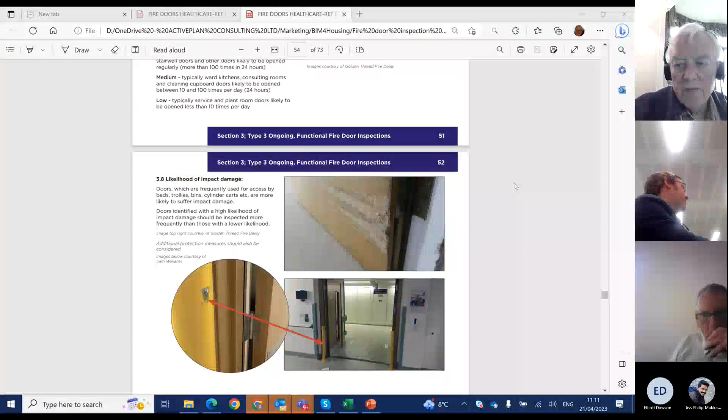Let me just share my screen. It's interesting, the guy coordinating this for us is Alan Oliver. He's the one that did the work for this, he's the author of it.

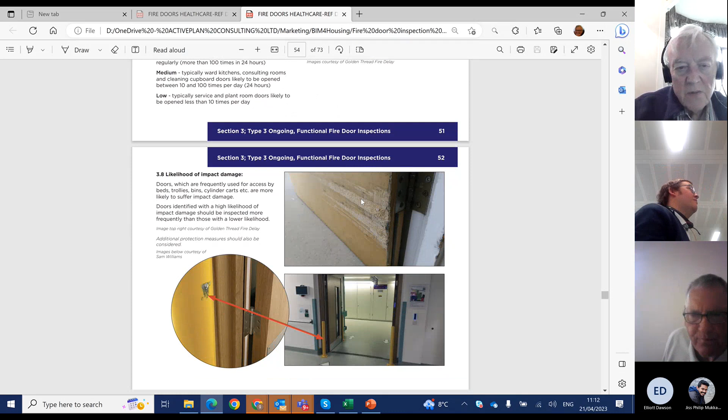Paul Bray from Plymouth pointed me at the guidance that's come out from the government, and when I went into it, it's actually got Alan's examples in there, which is nice. You see what he's got here to indicate what damage is and all that sort of stuff, so if we could get some similar material.

So you're looking for domestic pictures rather than commercial.

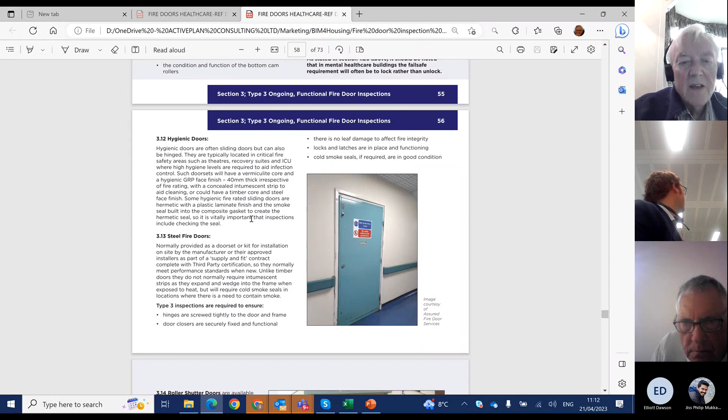A lot of it is a matter of doing a sanity check on the text. Alan's gone through and taken out the references to healthcare buildings, but your chaps will have a better understanding to see if there's anything daft in here that doesn't suit the purpose.

Do you get my drift? So this text here is what you've been, or what has been issued.

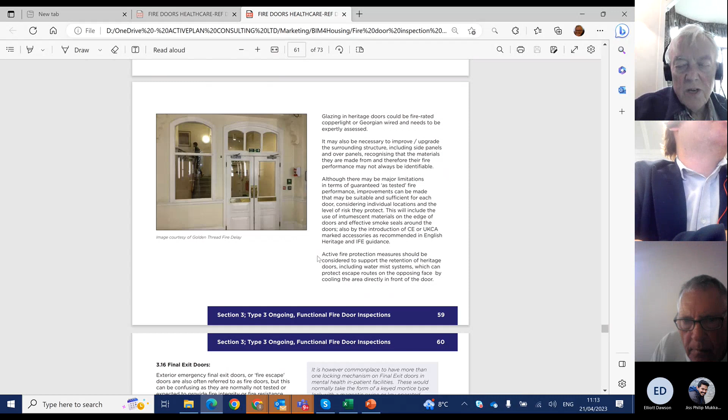Sorry George, back now. Yeah, that's right Paul. We're just talking about the work stream that Elliot's been helping with on standardising fire door inspections. Oh, fire doors are easier, aren't they?

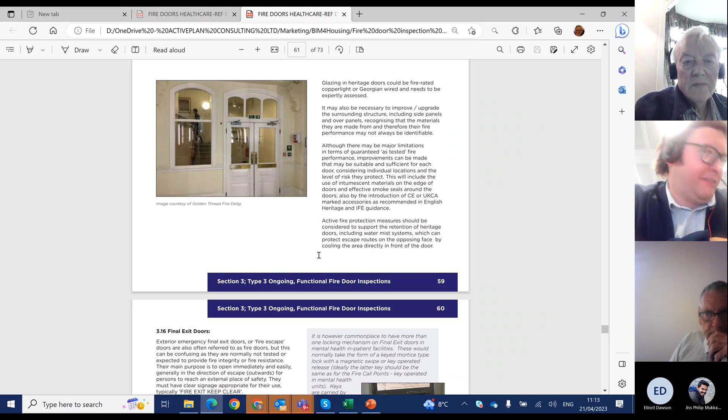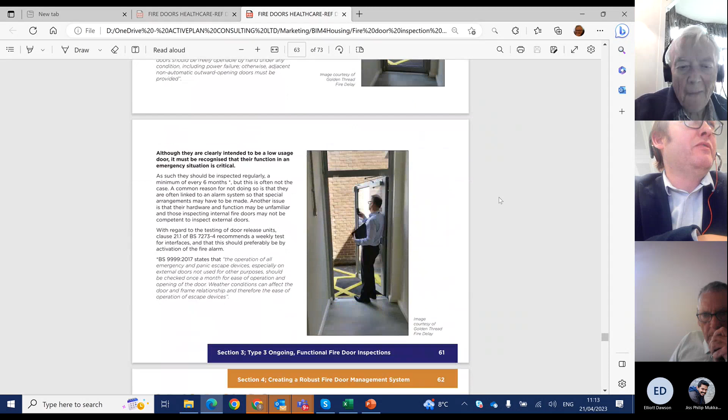Absolutely, I was just having a conversation there, funny enough. I can't remember if you met Elliot, so I do apologise mate. I think I've seen this bit, have I seen this one before George? No, this is what we're currently working on.

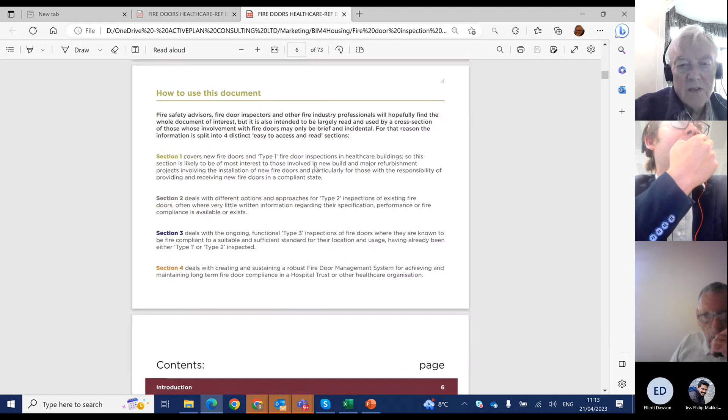So what it is, Paul, is a standard - sorry, it's guidance that has been produced by the NHS, and it's got all the senior people involved in it, the National Fire Chiefs Council and all the rest of it. And what they've done is broken down fire door inspections into 3 types.

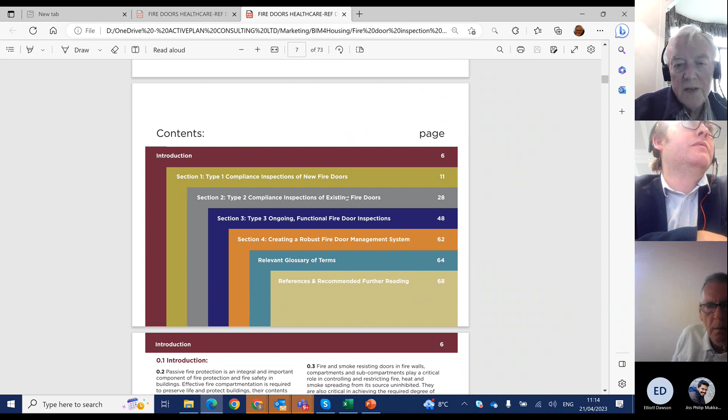One is checking a new fire door to make sure it's compliant, then checking an existing fire door to make sure it's compliant. Once those have been done, you should never need to do a type 1 or type 2 again as long as you keep your records correct. Then you've got the major service and the following on service - same thing we're doing with all the other kit.

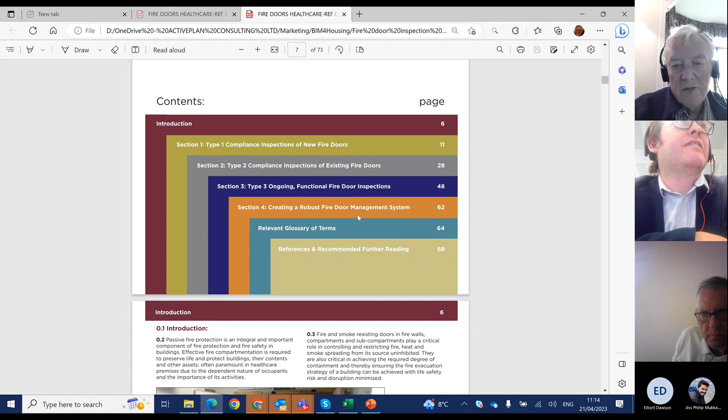And then you've got a type 3, which is the ongoing functional service, and section 4 is putting that into a fire door management system. We've had about 50 people involved in this over the last 2 or 3 months, and our objective is to take this document, which is pretty good we feel, and make sure it's relevant to housing.

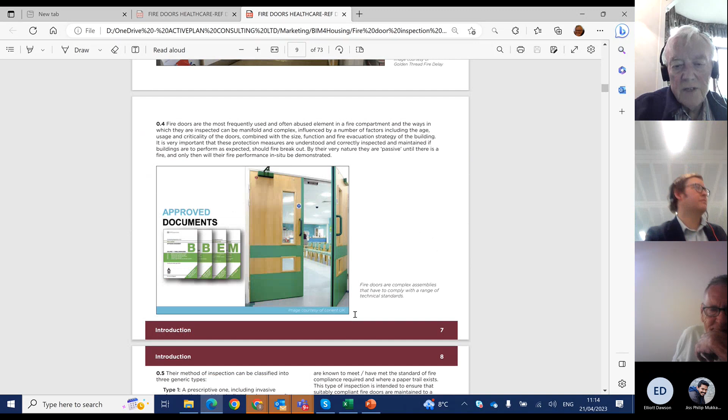So I was just asking - Elliot's a fire door manufacturer, so he's been helping on the fire door inspection side of things, on new door inspections.

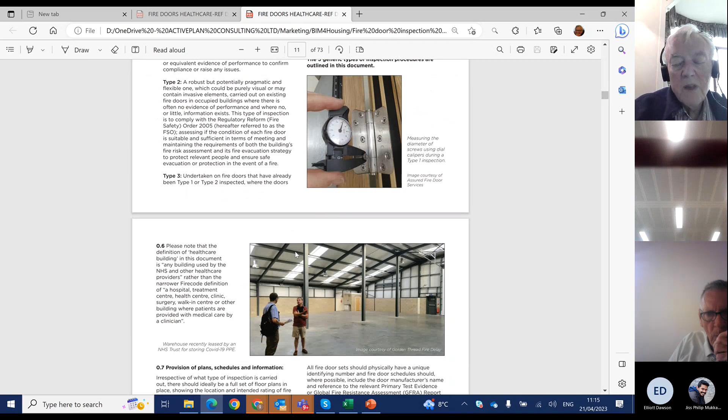Elliot, Paul works for Mace. Okay, yeah, so he's a technical director or something like that.

We're so good I haven't got a bloody plug socket to plug my damn laptop into, so if you lose me I apologise in advance. I'm trying not to get too technical then. We're not technically enough to get the bloody plug sockets to work, right? Oh, the joys, the joys, the joys.

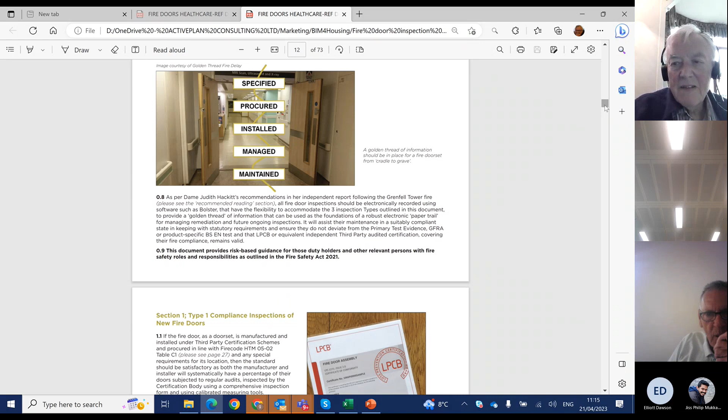But Paul's particular expertise is in the M&E element of things, smoke control and things like that. Yeah, well that's what I'll do as well.

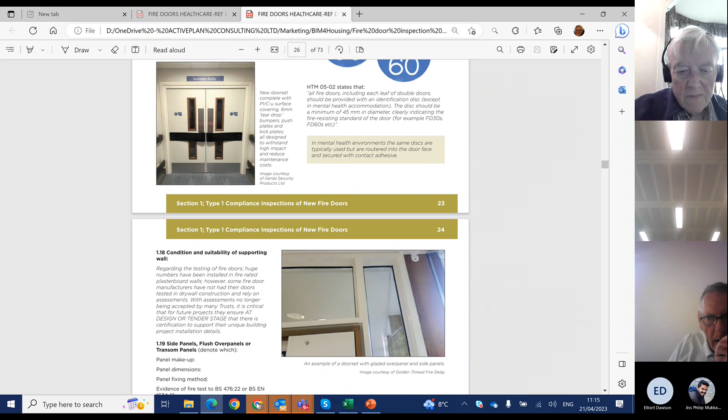If you give me 1 second, I think I've got the power. Nope, I haven't got the power. Have I got the power? I've got the power, I'm there. I'm in, it's back, we have life.

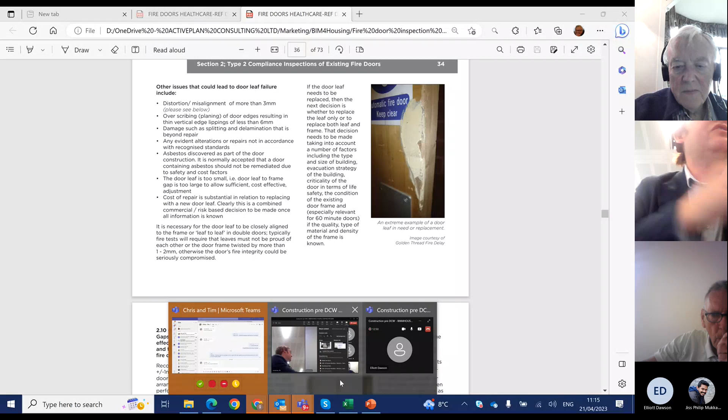Now what it is, I'll just share something quickly because you'll find this interesting. I haven't had a chance to talk before, so give me 1 second, let me just share my screen. Which one have we got, which one here up for the minute? Okay, give me 1 second.

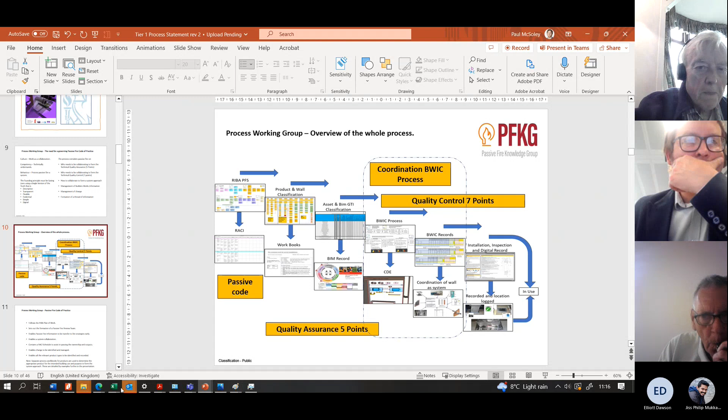So, I don't know if you've seen any of this.

We did a big exercise a while ago with me and Paul White, who's the chief protagonist of fire dampers and smoke control, because there's a lot of good work going on around us at the moment.

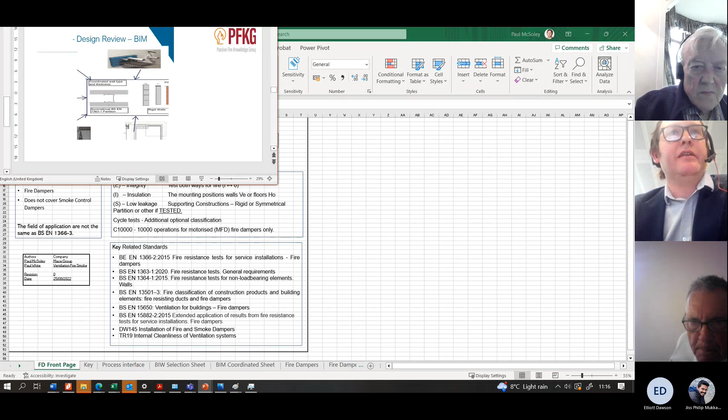What we try to do, if I just bring this down quickly, get down to the screen properly.

So we're trying to get to the point where everyone recognises that. Correct me at will, but you don't have to test fire doors in both directions by standard. You have to do it for national regulation, not by standard.

Whereas dampers, you have to test both ways because they're automatically classed as asymmetrical in the standard, where doors aren't classed as asymmetrical - though the standard will note whether you believe it is. But in national regs, it says you've got to make sure they're tested both ways around. It's all in Doc B, from memory.

So we look at all these things like doors, pipe work and stuff like that. And if you look at pipe work, people think it's fairly straightforward. What we did for public health for SoPHE this year, we presented this part here because I sit on this group and do a lot of stuff around process working.

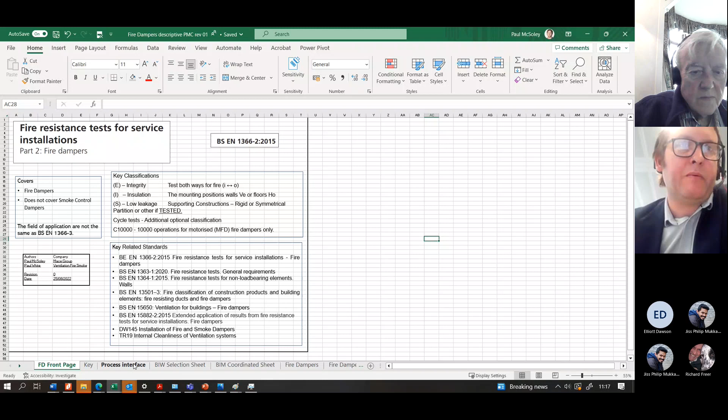So when you look at how complicated - I'll show you what fire dampers look like when we started off - because George and I before looked at the process for selecting one damper and one wall, and that's what it came out at. Wow.

And that is as simple as you could make it. If you look at fishboning stuff, that's what it is, but done in a different format - how you look to get the risk of the space.

The space risk affects the resistance classification you need. Like for doors, you could need an E rating, a W rating for a glass part, an I rating, or an S rating, depending on what you're doing. You've also got kit that sits on the door, which has all got its own testing parameters. There's a lot to it.

So for doors, I'd expect this to be enormous. When we looked at smoke control ducts - not the same thing, but you'll see we did smoke control ducts and fire resistant ducts.

We haven't finished this one off, it's going to get bigger. That's what it kind of looks like - you can see how complicated it is. It's all about space risk and system type, how it operates.

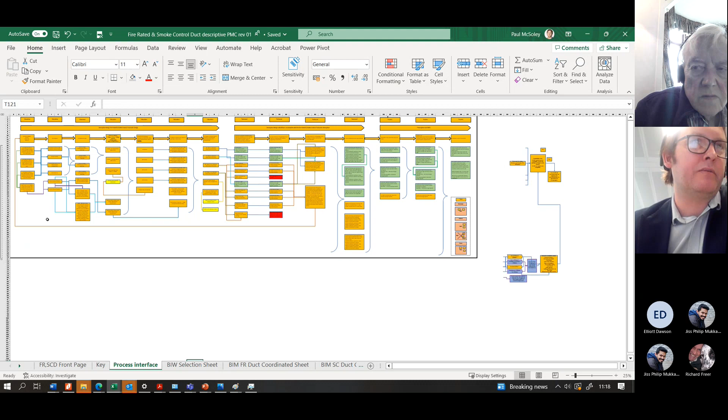Just to explain it earlier, everything's got ways to describe it. Is it dynamic - is it performing a function like a smoke control system or sprinkler, doing an active part? Or is it transient - because a fire door's transient, isn't it, because you walk through it. It can be open, swing both ways.

It was getting into a different language, because let's be frank, the industry is full of very uneducated people - I don't mean that to be disrespectful, but the knowledge is not very good. I've often joked in lectures that if you put Lypsyl on the table and the instruction says remove cap and push up bottom, I don't know where they're going to put it. That's the industry you work in.

But it's all based on space risk. So some things are static, like pipe work. But when you take pipe work - because I sit on the test standard for this - it goes through a wall, so it's a horizontal component in the vertical wall.

When I take this, I'm just going to see if I can do the quick comparison. Do excuse me, I was out last night and there was a lot of alcohol involved, so I apologise if I'm stuttering a bit. When you take fire dampers, I've got the diagram here.

They're a vertical device and a vertical wall, so it's not the same V and H. They're opposed - where pipework would be horizontal, this would be vertical. Does that make sense? There's nuances around all these components when you look at things as a system.

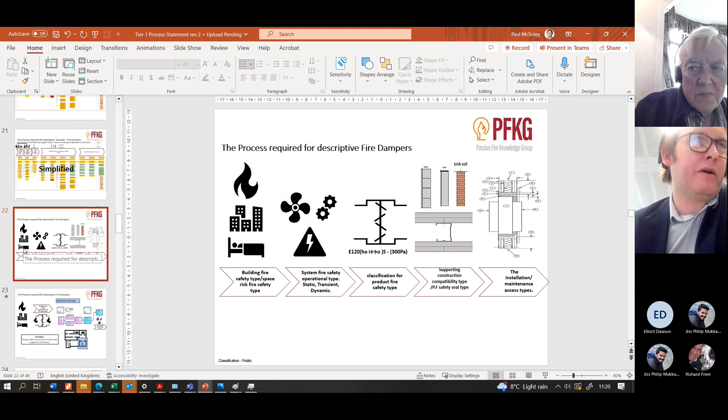So the system approach is understanding what goes in it, and the wall itself and its ability to house it all - whether it's the hole sizes, the amount of holes within it, and whether it's actually the appropriate substrate in the first place. I'm sure, Elliot, you'll hopefully confirm this - some fire doors will only work in brick and block, and some will work in both.

Yeah, so we've tested in several different substrates, because you need the wall, the substrate. There's no field of application for doors essentially, so we've tested in drywall, we've tested in brick, we've tested in block, we've tested in stud, shaft wall. The only thing we haven't tested in is no fines, and that's occasionally what comes up, and we have to walk away from those projects.

Because what's going on at the moment, right - it's a bit like, to give you a different way of looking at it, I need some help, probably from yourself, and I've mentioned it to George previously, probably in the pub this year, but I need some help developing the flow chart for doors, right?

Because what we're trying to do with PFKG - and you'll see this, I've got some stuff to send over to George on this because I did a presentation with the SCP in Leeds on it, and the guy Douglas from the Architectural Ironmongers was there.

Do you know Douglas? I've not come across him. I might have done - he's like the Guild of Architectural Ironmongers. Is it Doug Masterson? Yeah, Doug Masterson, that's it. Fucking brilliant guy, he's an absolute big character, great guy.

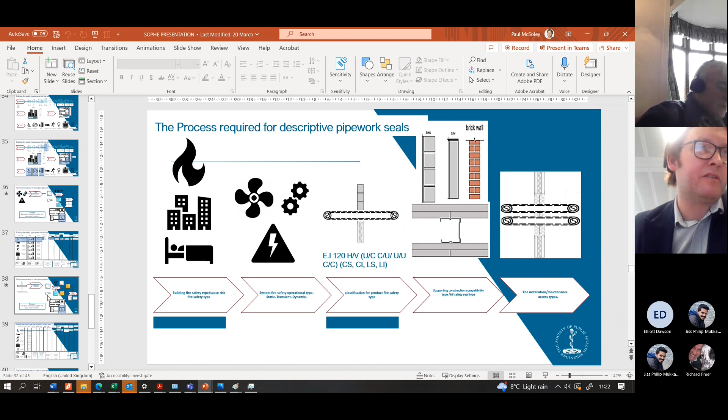He did a presentation on doors - it was mind blowing. So I need a bit of help, and I've got to get this into an order, because what I'm trying to do is like when you look at pipework - I'm not finished with pipework yet - you've got to go, what do you need to select in relation to the material to know what it is?

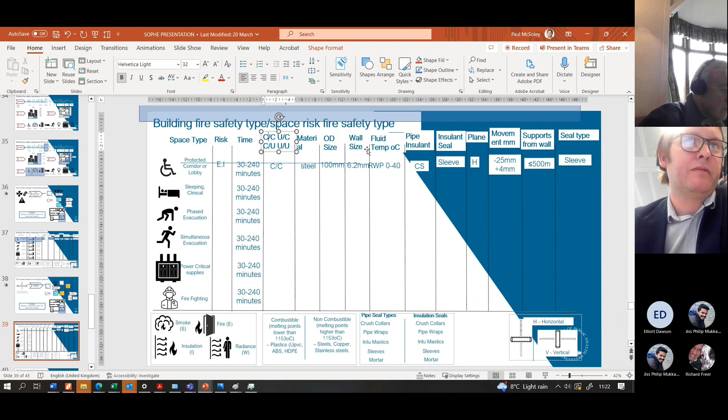Well, you've got to know whether it's - let me correct this now, I mean to correct this for days - I need to understand whether it's continuous through the wall in the same material for the next compartment, or whether one material changes to another and it goes through the wall, and which direction that is, or whether it's basically a pipe that goes through the wall which is uncapped. So it could be a steel tube going through a wall and someone's put plastic either side of it.

That becomes a UU test. It'll never pass, it'll fail, because all the fire and smoke just goes straight for the hole. So there's things like this that I have to consider.

I want to know the material and the bore thickness, especially when it comes down to combustible pipes, because it doesn't always crush the thicker bore pipes if it's been tested on a thinner bore. Does that make sense? And the reaction to fire with the plastics is important, because it's no good putting it on a polyethylene pipe with a reaction to fire of F, where the one it was tested on was B. Do you know what I mean? Yeah, one's going to flame through the wall and set the other room on fire.

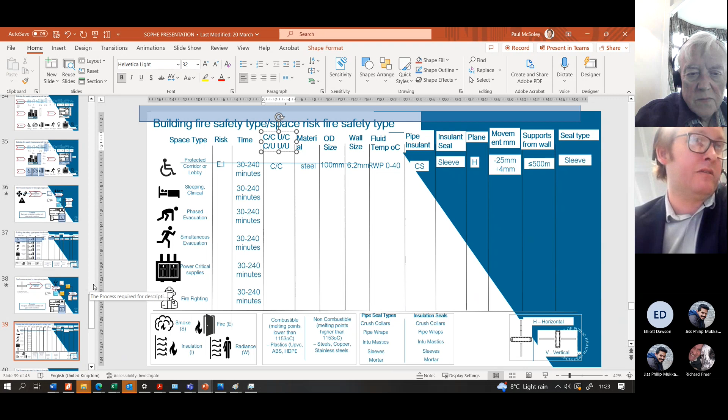And these are the questions that don't get asked, because as a tier one contractor, I've called us out externally and gone, do you know what, screw the product manufacturers, we don't know what we're doing. We do not know how we get to what's appropriate for the circumstances before you even get down to doing inspections, right? So what we did was, just to fill you in, we sort of went - if I've got the other diagram here, hold on, because I'm jumping around.

This probably deserves a bit more time. I've fortunately got to go down to look at a load of dampers installed incorrectly in a job, because I love doing that.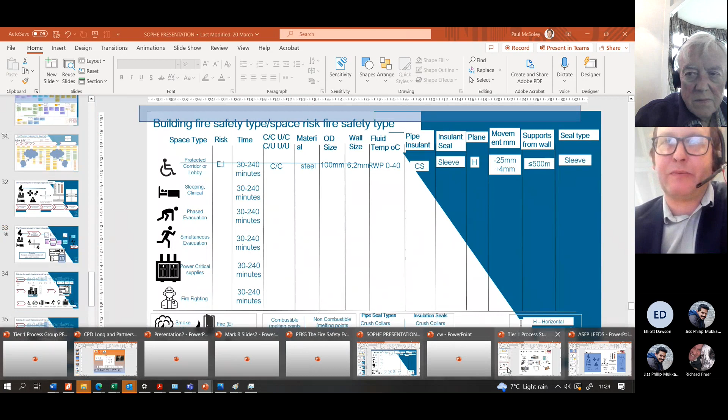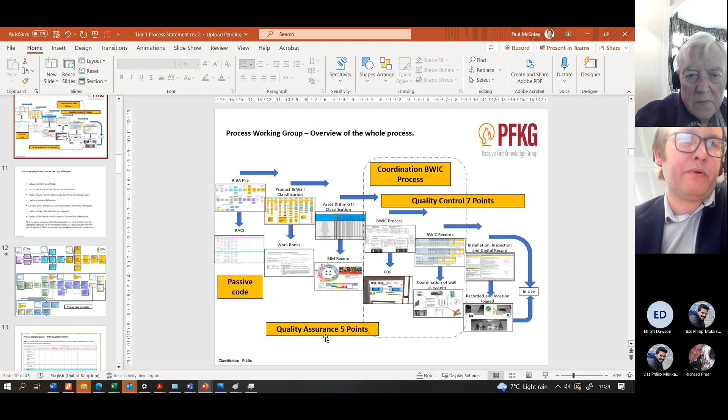Honestly, we've got to get to a point where we can get people to behave appropriately - that's the procurement bill piece from David Mosley, how people behave around it, how you work out what's appropriate for the circumstances. There's 5 QA points, and those 5 QA points relate to the building type and risk of the space, because that will vary.

If you think of it from the fire door perspective, there's nothing worse when you do the big unveiling, like a Picasso, and someone goes, 'What's that?' And he goes, 'Well, of course it fucking looks like that.' Do you know what I mean?

It's got to be, in thread purposes, linked back to what the risk of the space was initially. Was it sleeping risk? Was it phased evacuation? Is it an open riser across user groups? Because that's an S rating any day of the week, not an E rating.

All these kinds of things come into it. Is it an explosive atmosphere? Because if it's an explosive atmosphere, you might want an I rating on the door, regardless of 25% of the volume of the wall. Does that make sense?

It's about getting that absolutely right - in George's terms, getting the ontology right. So then you know if it's transient or static, you can tell how it operates.

You've got DDA and security on doors. You might have shear locks, multi-point locks, Z brackets. You just don't know what would be appropriate. You might have crash bars, I don't know. Then you can classify it against all those parameters.

So you get a number for what it actually should be based upon the risk of the space. Then you can compare wall type, what else is in the wall - that's the system approach.

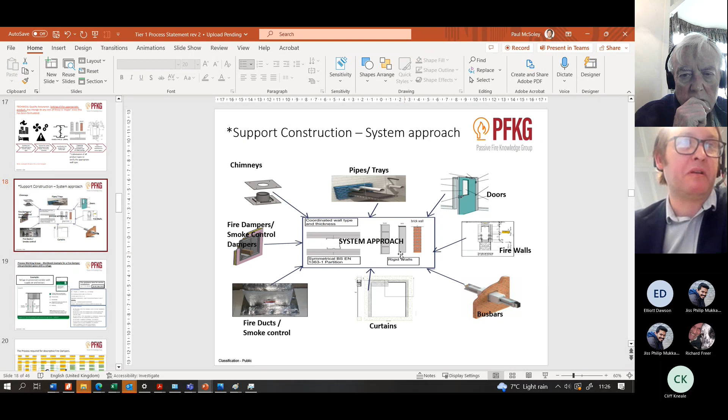Because it's no good having a door that works in a drywall just to find out I've got a 2.2 meter by 1 meter duct that goes through it, and the building won't support the size because it's going back to block, and you find your door's only tested in drywall. They'll just go, 'Mr. Door Manufacturer, you haven't done your coordination.' It's bollocks. So this is why it's all going wrong.

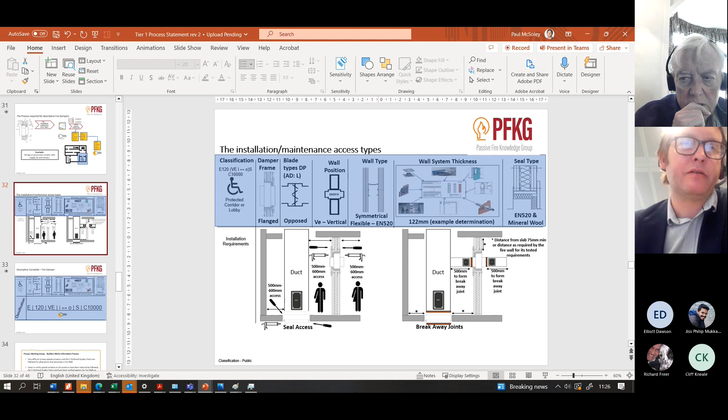Then you can go into how do you install it. So we know for things like dampers, you need enough space to form the seal on both sides. You've got to have access doors for cleaners. It's got breakaway joints. I've got walls on drawings showing right next to the ducts, and actually, because I've got to clean it, I still need a door - I can't ignore it. So this is giving proper guidance back to enable manufacturers, clients, architects to select things appropriately.

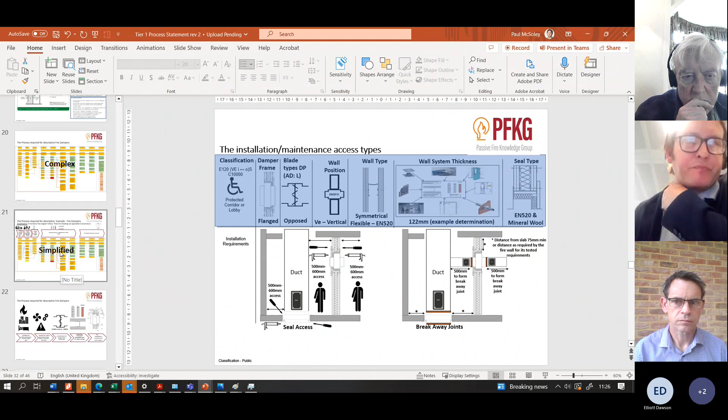And obviously, there's two things in relation to the digital side of it. I think hopefully, George, you won't bite my head off when I say this, because it's not controversial, but it's just putting this into perspective.

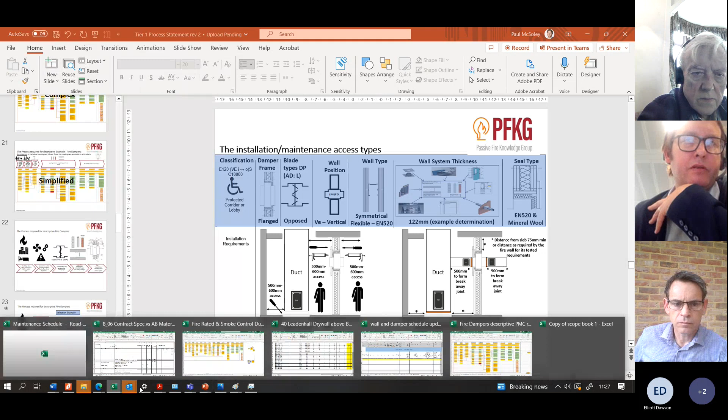To get the BIM side right and what's involved in putting it in Uniclass, I think will take a lot longer to get it right than I thought it would, because I need to record in BIM - I won't show you the BIM sheet because it's just like death by 1,000 cuts.

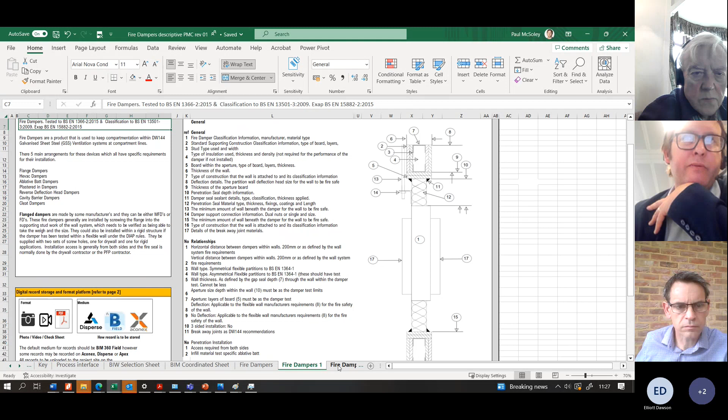But when you look at the frame types of dampers, getting back to your thing about primary inspections - that's your primary inspection for that type of damper case that exists on the market. That's what I need to record on the first inspection. One of those ones with rods, I have to do that.

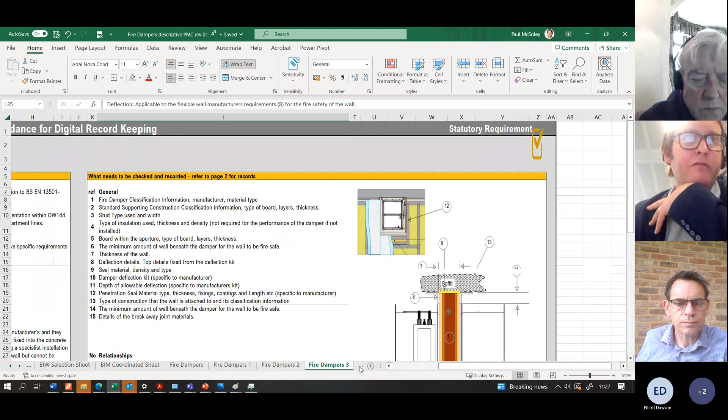I've recorded it all out in a format to enable people to do it, and this stuff will be coming out in things like NADC documents and BISA documents, eventually will get released so it's out there for everyone to use. But I think it will take a while before that's all in Uniclass, inside the asset information properly.

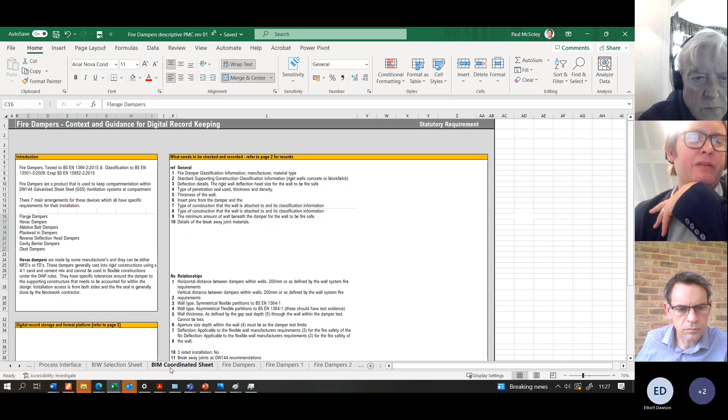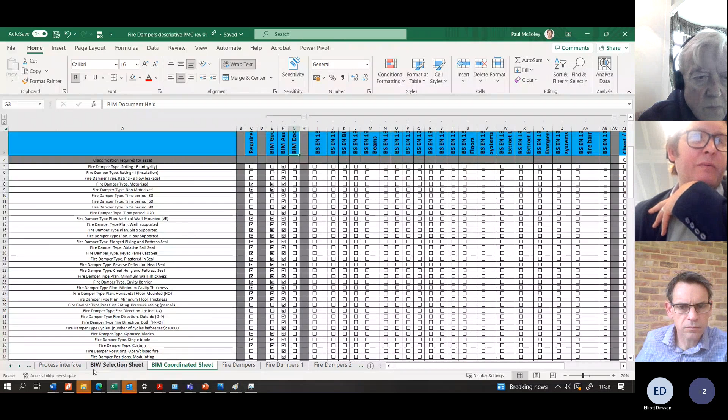Because, George, if I just do this quickly, you'll see what I'm indicating - it takes a second to load this up, but it's bloody immense when you look at what you've got to try and record. So I think what will end up happening is that when we do these kind of process sheets to get to that appropriate product, to get down to actually what it is for that location, obviously you've got to compare all the component parts.

That will transfer into the builder's work schedules initially. She'll end up with a schedule that shows what all the parameters of that selection is in that location. At least initially it's digitally recorded what it was, so it's hard to break that thread. In time, I think when we get the BIM to catch up, they will transfer into the BIM. It will become a lot more intelligent with things like AI. I think you agree with what I'm saying there, Jules, or partly agree with it. It's going to take a bit of time to get that bit right, I think.

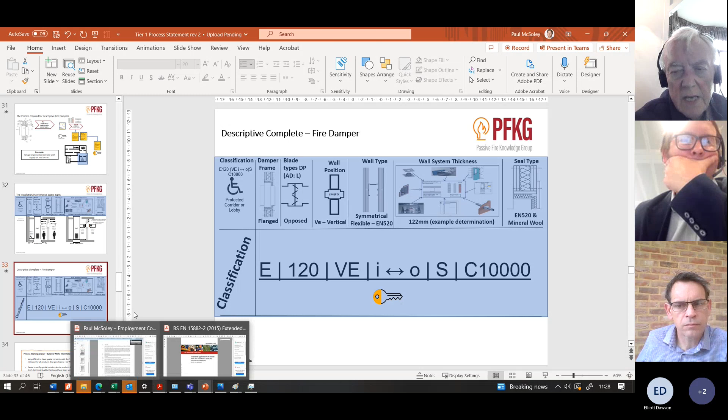Yeah, I think one of the challenges is that everybody at the moment is seeing that this information needs to be collected uniquely each time. And therefore, it's just completely overwhelming, and it won't happen.

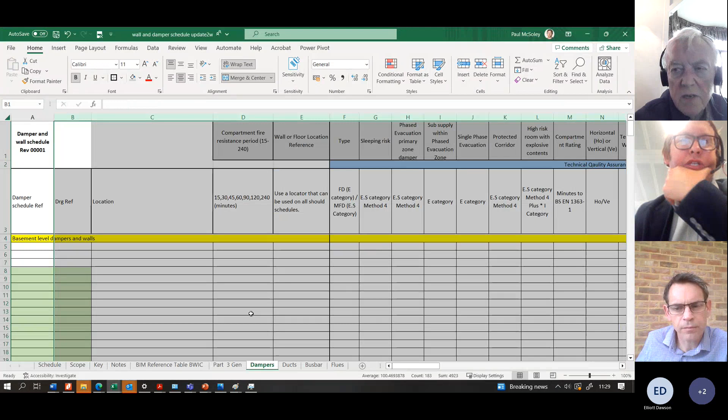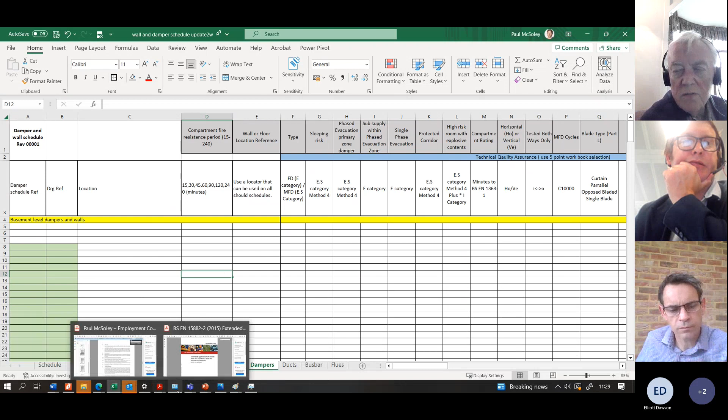I think what we've got to do is differentiate between what is static information and what is active information. And what I mean by that is the information that, for example, that Elliot would have about his doors. If that's a product that's been tested, then the information on that, I think, probably would be static. In other words, it's defined, and therefore, if you install 100 or 1,000 of those doors, the information is going to be the same.

The thing that's going to be different is what is done to that door to put it in the right context. So in other words, maybe it's got a couple of additional elements that make it appropriate for that door type. So it may be that Elliot's door is being used in a number of different things.

So the point about this is that if we can differentiate between the static stuff and the stuff that needs to be collected each time, then it means that list that you've just shown earlier can be very, very substantially simplified. Yeah, no, I'm with you. I was just going to add to it.

I'm totally with you, and I think one of the things I need to get to - this is why I'm dragging you into PFKG in some form very, very soon, on process around all this BIM stuff - because to get to the point where you've got a way in which it goes.

I'm sure, Elliot, because you work for a manufacturer - I don't know if you represent any trade bodies and things like that - but how the information is presented to you generally is, can I have a fire door, please, mate? Yeah, that's what happens a lot, doesn't it? Yeah. And this was happening with the damper - can I have a damper, please?

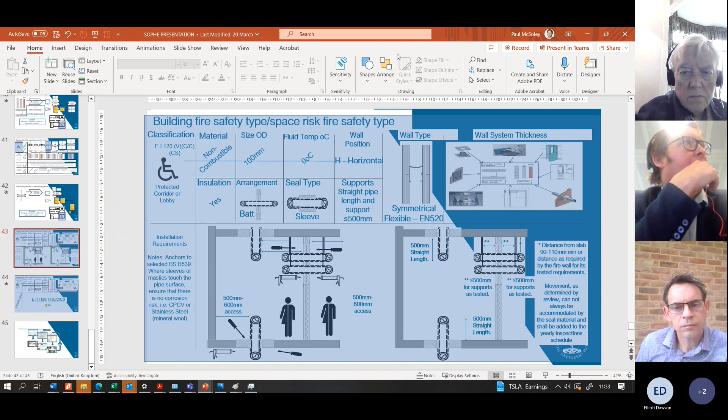If a builder or a developer came to us and said, we want a fire door, we take it on ourselves. We do not just sell fire doors to anybody. We would then do either a survey or we would ask the pertinent questions.

I suppose where you're coming from is those pertinent questions - how do you standardize them? I think it's all about space risk. Once you know what the space risk is, you can identify your E and your S requirement. Then your I requirement again can be about space risk as well, not just the volume of the wall.

So it's about having those things, and we did it for dampers in relation to this. Actually, can I just show you this, for Cliff's benefit - Cliff's a colleague of mine. Sorry, I can't see he's on the call, so I apologize. No worries - as I understand it, Paul, an S rating...

S stands for smoke, S resistance period. Is it S200, Elliot? Is that what it is? I don't want to get it wrong, mate, because I'm a bit feeble on this subject.

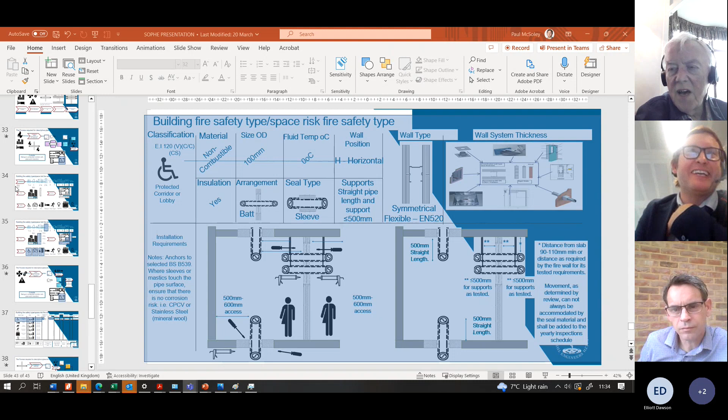Because you're here - and an E rating or an I rating, what do they mean? Let me bring the better one up quickly. Hold on, where's it gone? This one didn't leave us better.

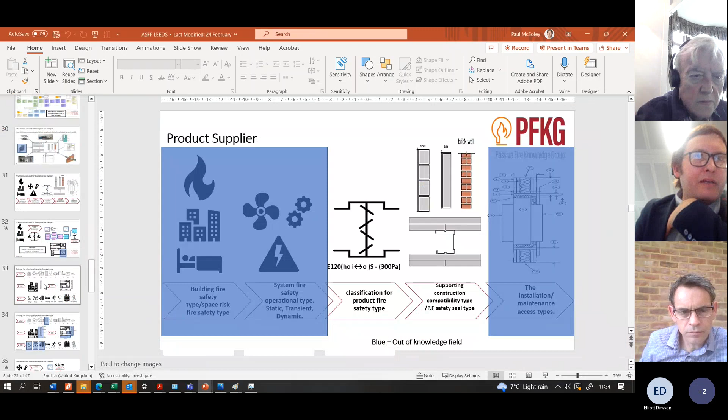So when you look at space risks, if you can see that - yes, S. Oh like, okay, fire - yeah, integrity. I didn't call it integrity, I just called it fire because it's more palatable. Insulation and radiance is W.

There are other things involved, because for things like structure it's got an R rating, since malleability is different. But I haven't put R on it because I'm not dealing with steel beams just yet. I will be, because they go through walls - I still have to deal with them as a penetration. But there's a lot of guidance, so I've got to get what I'm trying to do into the same format to enable an idiot sheet for people.

to do selection. The damper one's all gone through, we're all happy, this is right, it's going to go out on the website. So George, you'll get all this through - then it's something you can use to your heart's content. You'll get the original PDFs as well.

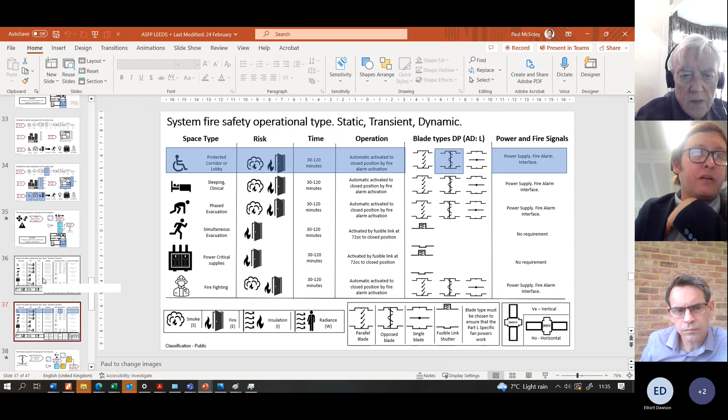So, PowerPoints as well, because you did let me borrow your key, if you remember. Yeah, no, absolutely, your fingerprints are on it, George. But look, can I be real - I've got to go over to this job now, and I've got people starting to crowd up over there.

Yeah, that's the same time. Is that the same one? Is it the same? It's the same day, yeah, same day. So it's across the corridor. So would you be - are you going to be there, Elliot?

Yeah, so we're going to be hosting because we've just passed all our UKCA markings, so we're the only fire door provider that can give a UKCA marked external fire door.

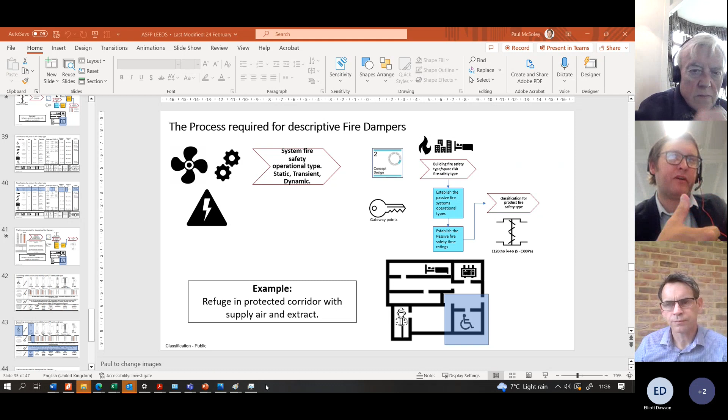I'm going to have to shoot, George, but Elliot, do me a favor - drop me a mail, and I think what we'll do is we'll have a chat about if we can, if I don't mind doing the heavy lifting, because if you look at this, what it does is it gives you all the frame types, the risk categories, all the stuff. It's all there, no disrespect, for an idiot to select what they want to.

Can I just ask one question, Paul, just before you go? So what we're trying to do for the event is figure out what information is needed for us to satisfy the building safety case. Well, what I'll do is, if you don't mind, let me just...

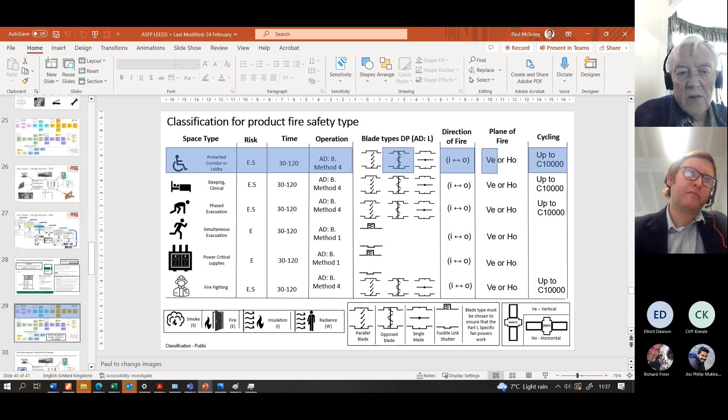So at one level, we've got landlords, and all they need to do is make sure that Elliot provides them a test certificate, right? On the other hand, what you're doing here, you're saying that what we need is to ensure that it's been designed properly, it's been installed properly, etc.

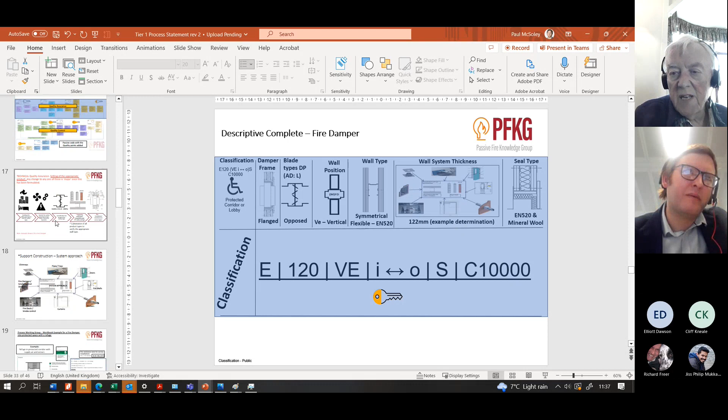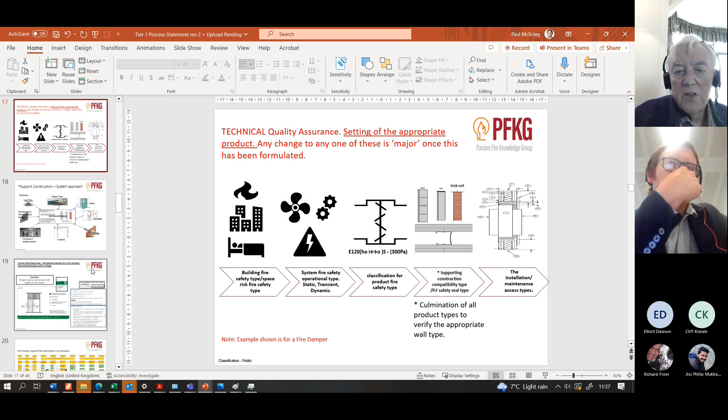My understanding is, therefore, that as far as you're concerned, if you are called in by the regulator for a project going through Gateway 2, for example, before you go into construction, you would need to be evidencing that you've actually got this.

If the regulator asks the questions, you need to be able to evidence that it's been done properly. Am I right? What I'll do, if you don't mind George, is have a chat with Joe Silly, and you have a chat with Ian McElway as well, because you know Ian, don't you? I don't mind having some of this stuff displayed, because we're doing this in the other hall, in the FireX hall for PFKG. I don't think it's going to be a drama to transfer this into what you're doing. No one will have a drama with it, but we'll just go through Ian and Joe, make sure everyone's happy.

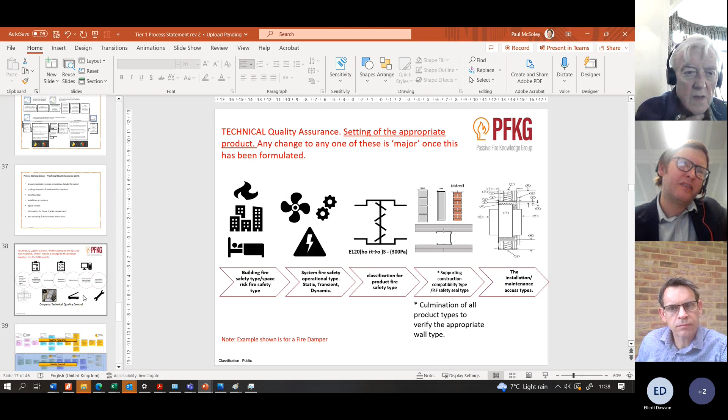Because we're doing all the peer reviews on this with Reba at the moment, around all of these 5 key principles, and the other bit is the 7 QA points. Everyone's going on around this, but it's all these bits before it that's missing. You know, all the 5 QA, and actually once you've got the known parameters, then you can do the rest of it. Does that make sense, Elliott? You need to have gone through that. It's that first bit you can't do because you're not fire engineers. That's the problem. That's what's all going on, and the fire engineers can't do it, and neither can the architects.

That's why it's all going tits up. But I'll have a chat with Joe, because I've got to respond to his walls as a system thing that's on my other screen. You have a chat with Ian, and if you want, Jules, we'll get these sent over and you can incorporate them. Yeah, definitely, so I'll pick up with Elliott. I'll explain what we're doing with Fizz and also with Balfour Beatty as well.

So Balfour Beatty, Martin's on board with the whole product library approach. No, 100%, it's the right thing, George. I'm with you, it's the right thing. Yeah, good. It's good. Yeah, and I spoke to London Underground this morning, and they're interested as well. So we've got some big clients and contractors engaged in it.

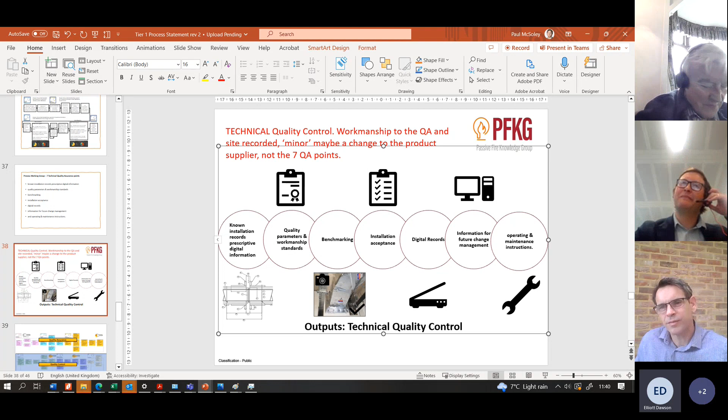Yeah, it's a force of nature, is Paul.

To say the least, but you know, what we're obviously trying to do is to make it so that we've got a simple way of achieving that golden thread. What's been surprising to me, even though I learn so much every time we have these sessions, Paul showed me that several times, and every time he shows it to me, I understand an extra 10% or 20% because there's just so much there.

But I get the impression, George, that we're trying to almost cure or solve the unsolvable. There is almost too much for everybody to consider when putting these things together.

It's almost stripping it back for me sometimes to its simplest form - what components are going where, and how do they interact together. And if you have the BIM system where you've got a suite of products, you could almost do it in the background, letting the machine do the work. You plug in your product and what it's tested in and what it's tested to, and that gives you a result at the front end of, right, if you're going to build this high rise block of flats, you're going to have to use that door with that wall with that ducting, and it's almost done for them, if that makes sense.